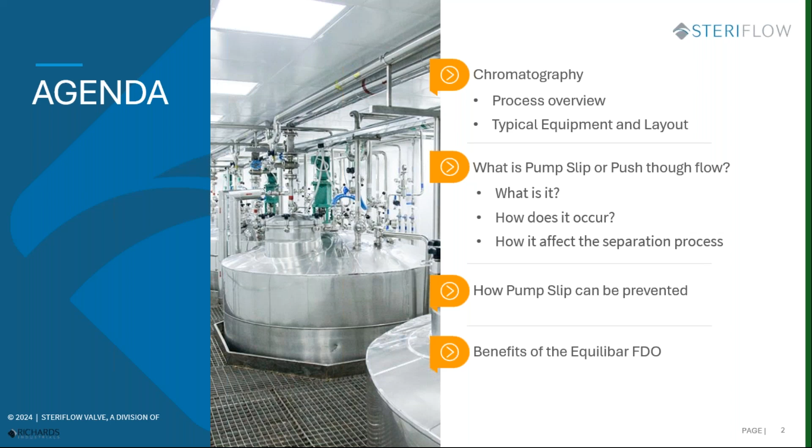So just to highlight the initial application of chromatography: it's a very critical step for purification in biologics, and a very commonly used process. Basically, it works by using buffers of different pHs that are flown through a column packed with various resins to achieve a level of separation. The more precise and controlled the buffer flow is into the column, or the gradient into the column, the more efficient the process will be in increasing the overall yield of the biologics you are producing.

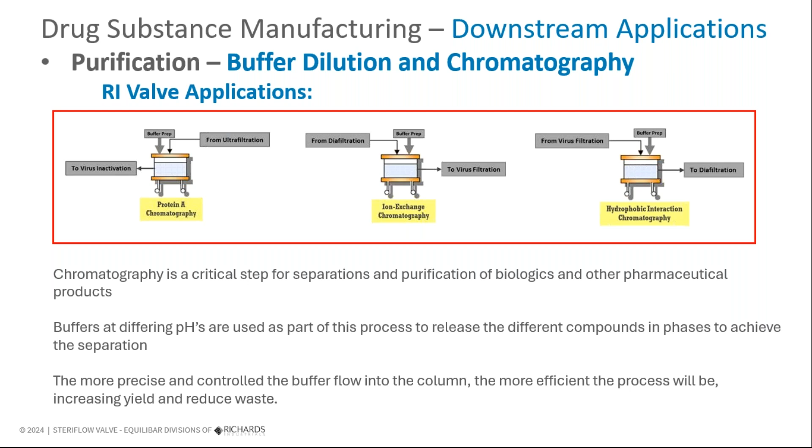If this process is effectively carried out, you will reduce waste as well, because the buffers and product in the column are very expensive to maintain and produce. So ultimately, the goal is to have a very high yield, a very efficient column, and ultimately reduce waste and improve the product coming out of the column.

So this is a very simplified schematic of the chromatography process. Typically this starts with several different buffers that are blended as needed through the column, to achieve the desired pH in order to remove various proteins out of the column. So in an application like oligonucleotide production, you're going to be producing various long chains of proteins that will adhere to the resins within this column.

Once these proteins are built and are required to be pulled out of the column and separated, each protein will have a different pH that will cause it to release from the column and be separated and removed for further purification. As you need these buffers, they are blended in real time, and they will vary through the column. These are blended using positive displacement pumps, which are used to control the flow into the column. As you need different pHs, the pumps are adjusted and then flown into the column.

You also want to reduce the amount of pulsations going into the column, because pressure pulsations can lead to disruption of the resin beads and potentially damage the proteins being produced. So the key to chromatography is having a really precise gradient elution, and reducing the amount of disruption from pulsations into the column.

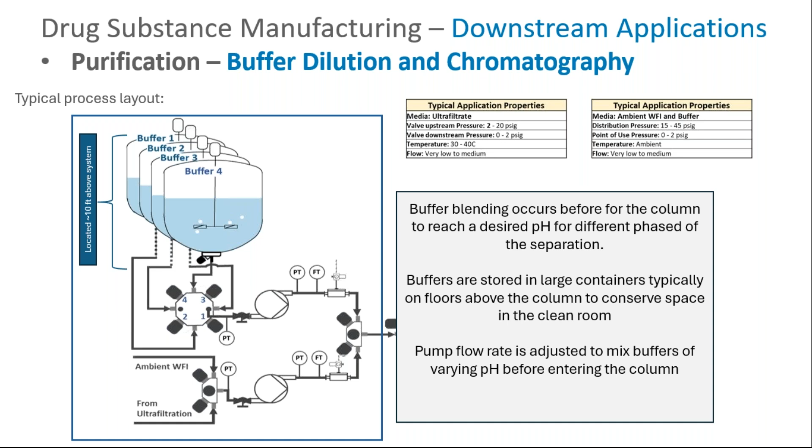This reduces space, but it also creates a head pressure as the buffers flow into the pumps. So the pump flow rate will be adjusted as the buffers are needed to mix, but then the head pressure needs to be taken into account. If you don't store buffers above the clean room, typically these are in big vats. So even in small chromatography systems where you don't have large buffers above the clean room, you can still have big tanks that also produce head pressure.

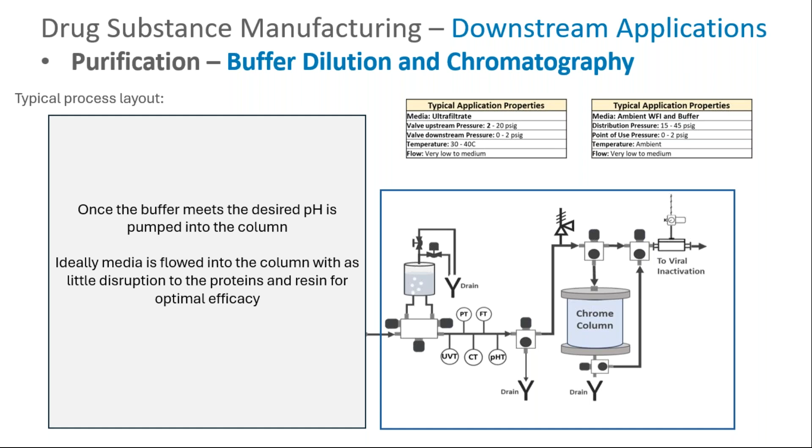So the second step is once the buffer meets the desired pH after being blended with the pumps, it is then pumped into the column. Ideally, this media flows into the column with as little disruption as possible so it does not affect the protein chains or disrupt the resin. All of the resins are very finely packed in a highly engineered way to get the precise surface area required to achieve the separation. As you have pulsations going into the column, you can disrupt the resin matrix, which will affect the overall yield or separation, affecting the amount of proteins or biologics you are hoping to achieve at the end of the cycle.

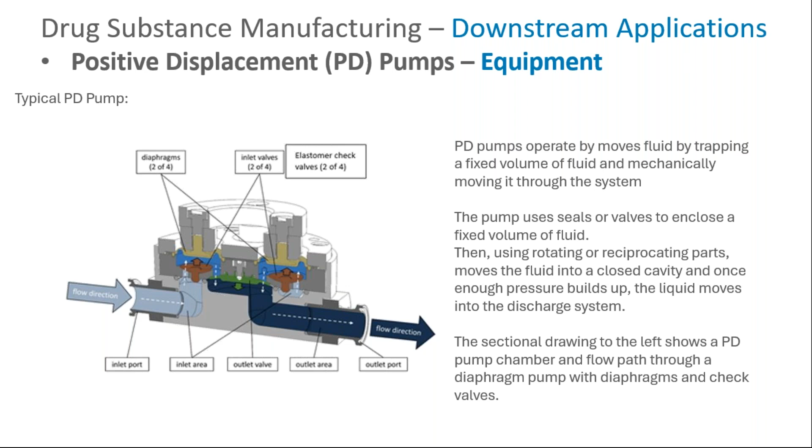So simplifying the schematic a bit more, you have a pressurized tank above the clean room. A typical one floor above could be anywhere from 7 to 10 feet above the actual clean room, generating about 3 to 4 psi of static head pressure due to the weight of the media in the tank. This is mostly done to preserve room in that clean room. The clean rooms are smaller areas and don't have a lot of room to store multitudes of different types of buffers, so by moving this above the floor, they are able to save a lot of room.

However, you do generate that head pressure. So like I said, 7 to 10 feet, you're looking at 3 or 4 psi on average. But if you have larger tanks or stored on higher floors, you can have a significant level of head pressure. This can be referred to as either elevation pressure or net positive suction head. Ultimately, it is just a higher level of pressure than atmosphere if the pump was starting at an even pressure.

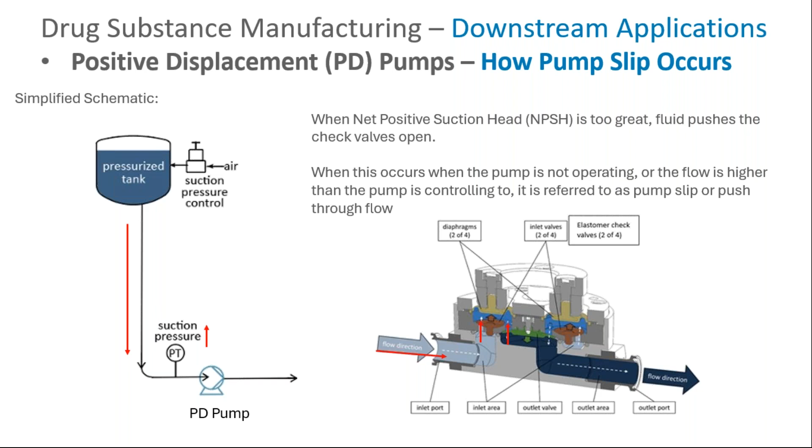So the higher this tank is stored, the more head pressure is generated, which increases that net positive suction head. This can cause an issue of push-through flow or pump slip, meaning since this pump is meant to be starting at standard pressure, the flow or positive head pressure will push through that pump, filling the chambers and cavities, and push through even when the pump is off. So when the pump is at 0 RPM, not operating at all, that positive head pressure is enough to push media through the channels of the pump and continue flowing.

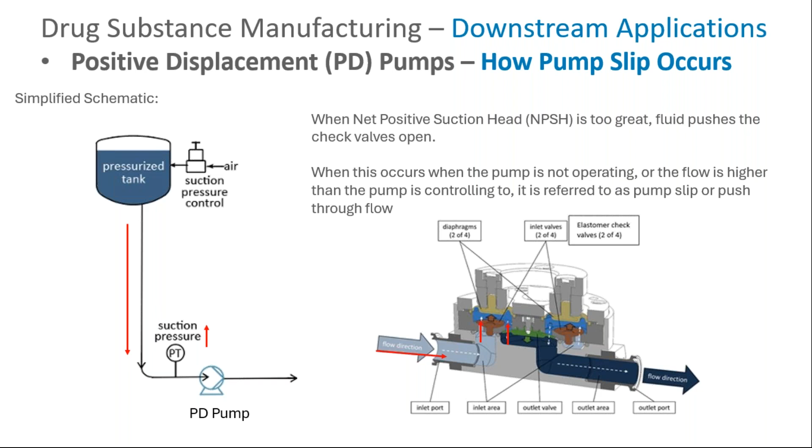So this is referred to as several different things in industry. Pump slip is very common, push-through flow is very common. What this means is even when the pump is off, there will still always be flow occurring, especially as you have that higher head pressure if you're stored at higher elevations in order to preserve that room.

So what does this mean for a chromatography system? Push-through flow overrides the pump's ability to actually do effective control at lower ends of the pump range. Since you have a net positive pressure, the pump cannot operate at those lower pressure levels. If you want to control flow rate at low pressures, the pump does not have the ability to counteract that head pressure.

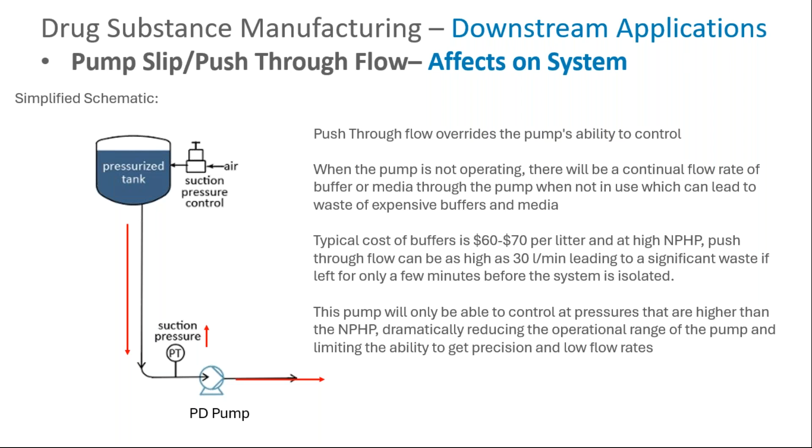So how can we prevent this? There are several different ways end users look to prevent pump slip. One of the most common, and most readily thought of, is to simply put an isolation valve right at the outlet of the pump to turn off the flow once the pump is off.

So once you're done running your system and the pump is turned off, you still have some level of push through flow. You can simply turn an isolation valve off to prevent any flow rate into the system. Typically there's still a little bit of a lag, because you want to make sure the pump is off before the isolation valve is closed, so you don't cause any damage to the pump. So if you turn the pump off, there can still be several minutes of push through flow until that isolation valve fully isolates the system.

Now, it does limit the amount of waste you have, but you're still going to get a few minutes of waste, and even a few minutes of waste can be hundreds of dollars depending on the level of push through flow or pump slip you're going to see.

The biggest risk here is that if you just have isolation valves in the system, and the control loop isn't tuned correctly, or there's any damage or miscommunication in isolating those valves, you really want to avoid isolating the pump before the pump is off, because that can cause significant damage to the pump. So there is risk there.

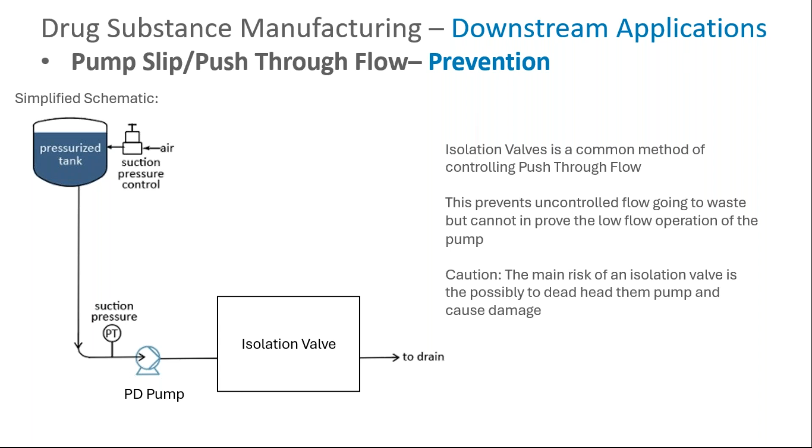These pumps are very expensive in a sanitary process, so there are better ways to reduce pump slip and also get more use out of your pump. This is the key topic we're going to talk about today.

The best way to really reduce pump slip in these types of applications is a high precision back pressure regulator that allows the pump to slowly turn off and limit or eliminate any push through flow, by having a set pressure equal to that net positive head pressure. Basically it cancels out that positive head pressure by setting the back pressure regulator to close right at that same level. So when the pump is turned off, the back pressure regulator closes off and eliminates any push through flow.

But also, because it's only counteracting that net positive head pressure, once the pump turns on again, you do not need to make sure you open an isolation valve. That pump can simply turn on and it will overcome the set pressure of the back pressure regulator and immediately start working and flowing media into the column.

This also allows the pump to run at much lower RPMs and much lower flow rates, because the back pressure is being held constant, and the back pressure regulator is effectively canceling out any of that net positive head pressure. So you do not need to limit the pump's ability to run at lower volumes.

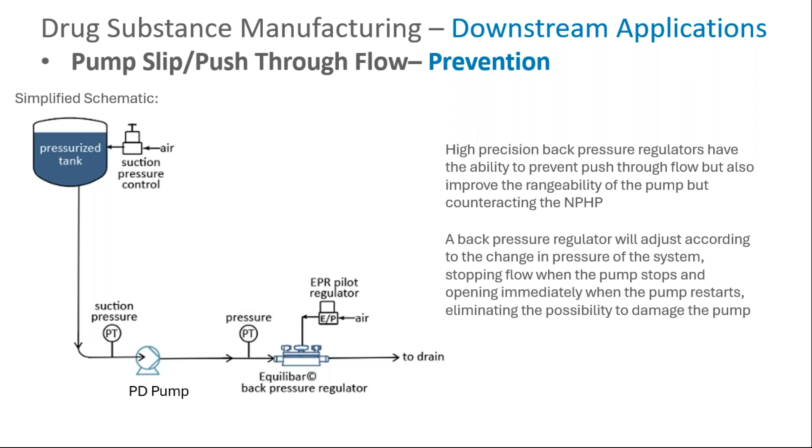Now, 7 feet is a very small distance. In actuality, a lot of these are stored much higher, but for the sake of this example, 7 feet of elevation, 3 psi head pressure — this means that even when the pump is off, so the pump is not pumping at all...

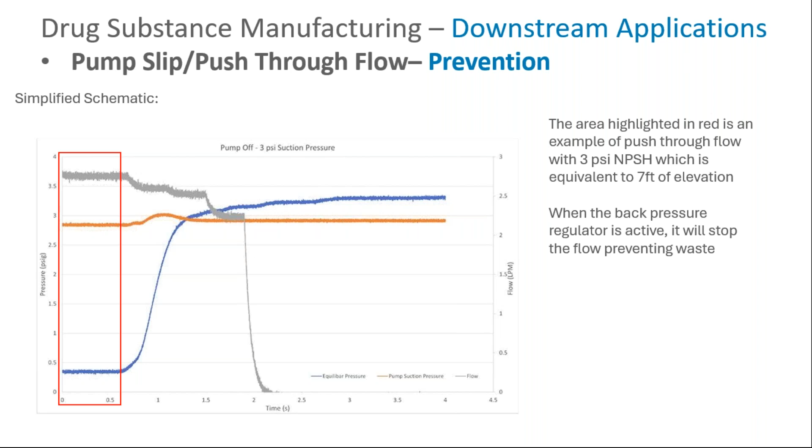So another way to look at this: because a pump can only operate over that net positive head pressure, we have 2 systems here. One is 7 feet of head pressure, or 7 feet of elevation. The second flow rate is about 10 feet of elevation. So a 3 psi net positive head pressure and about 7 psi of net positive head pressure.

Most pump manufacturers will even limit the rangeability of their pumps to about 20 to 30% above the low end. So if you're able to run from 10 to 100 RPM, they'll mention to try to stay around the 20 or 30 range, just to make sure you counteract that positive head pressure, because you can't get control on that low end.

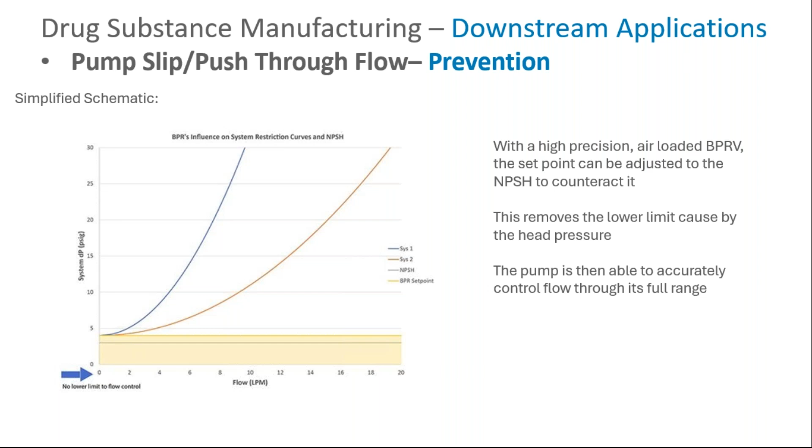When you have that high precision back pressure regulator and you're able to completely counteract that net positive head pressure, you're effectively changing that y-axis, allowing that pump to work at the very low end since it doesn't have to worry about that positive head pressure anymore. So this is the same curves and the same different options, but now that gray area has been shifted down, so you're able to accurately control at much lower flow rates of 1 to 2, single-digit liter per minute. We have seen in our lab that we can control pumps down to single-digit RPM and get very fine control at that low end, because that net positive head pressure is completely counteracted by that set pressure of the Equilibar.

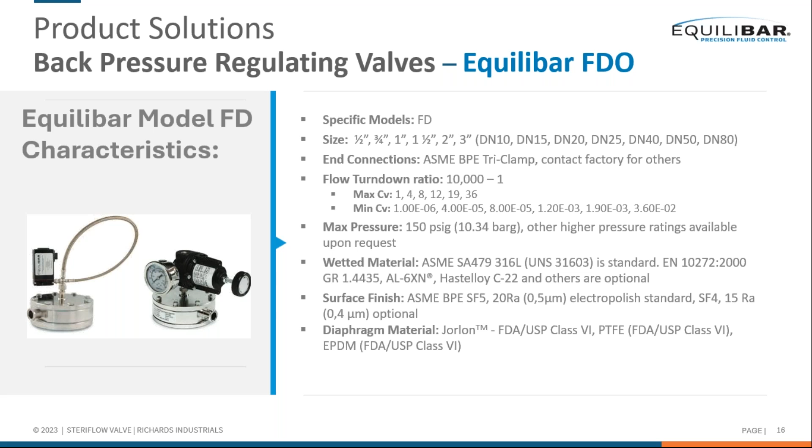So moving into what this product is, how it works, and why it can be so effective in this application: this is a sanitary back pressure regulator. It is air loaded, so a 1-to-1 air load, and it works by having a 1-to-1 air load of the set pressure to the back pressure.

Unlike some standard back pressure regulators or control valves that most people are used to seeing, this valve does not operate with a singular plug and orifice that moves up and down by either an air load or a spring. The control mechanism of this valve is this diaphragm right here and the air load on top. So instead of the media having to push up on a plug or a spring to affect the flow rate or pressure, the media is in direct contact with a diaphragm that is force balancing against that set pressure.

As the media comes in, if it's a small change in back pressure, so if this set pressure is set to 5 psi, as soon as the pressure of the system gets just above 5 psi, that diaphragm is going to start to move out of the way and allow the smallest amount of media to relieve out of the valve. And if it's a much higher change, so if you need a much higher flow rate, it will move the entire diaphragm out of the way and engage in the multitude of orifices that it has. So a very high rangeability and a very high responsive time, since the only thing moving is this thin diaphragm, rather than having to overcome spring tension and hysteresis of the springs, or even moving a plug up and down like in this design here.

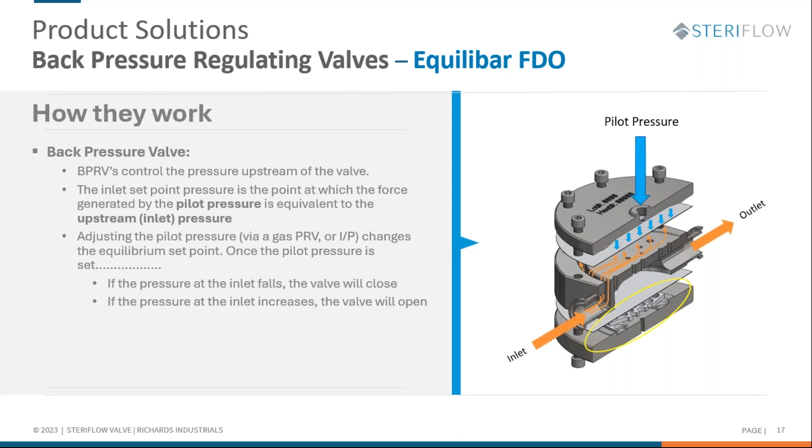One of the other things that is very critical to chromatography is limiting the amount of pulsations. Pumps in general are pulsation creators, right? So even if you have a very high-end pump that has minimal pulsations, just due to the fluid dynamics, there are pulsations that occur. And since this valve operates by having media flow through and basically be sandwiched between two separate diaphragms, it has pulsation dampening properties.

One of the design features this has is this crush pad right here, which was specially designed to limit the pulsations even further. In the standard configuration, these pulsations are reduced about 25% of pulsation amplitude in the trials we have conducted. So not only do you have this fast response time and elimination of push-through flow, you are also able to help reduce the pulsations flowing into the column. As I said, pulsations can affect the resin, which ultimately affects the separation process and the yield you get out of the column. So it is very important that pulsations are reduced.

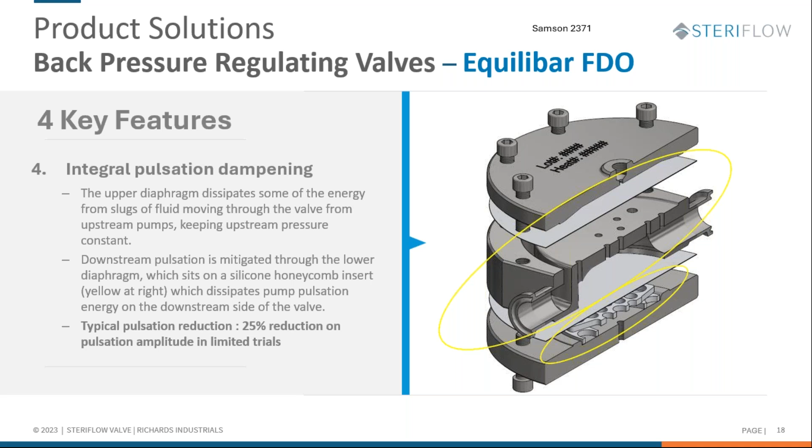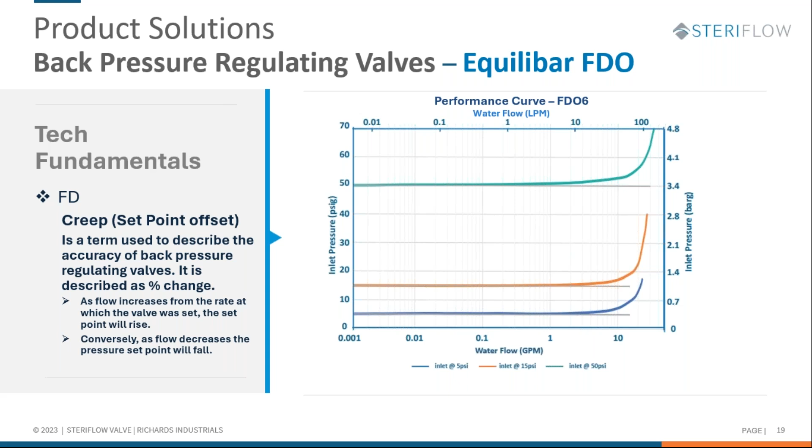These can be controlled by either a manual or electronic pilot. So if you want to set the set pressure to just have a static counteraction of that net positive head pressure - if the net positive head pressure is always 5 psi, you can have a manual pressure regulator controlling that pilot pressure, so that back pressure is always controlled at 5 psi. Or if your pressure changes over time, as your tank gets lower and lower and that pressure changes, this can also be controlled by an electronic pilot, which feeds into a pressure sensor that adjusts the set pressure so it can respond in real time to the actual net positive suction pressure of your system.

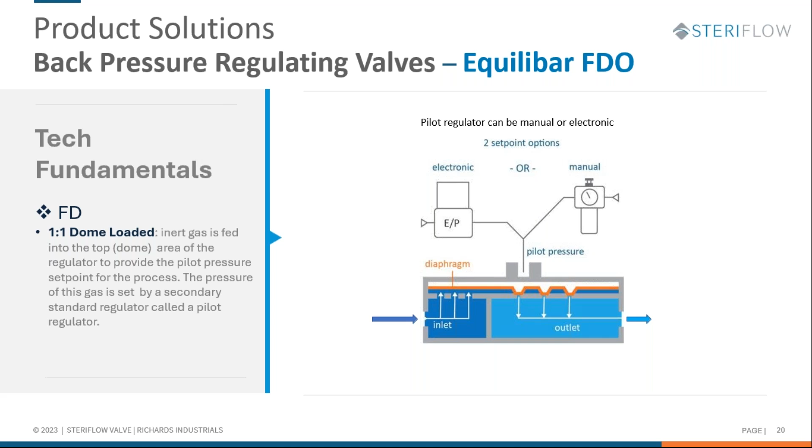Just some fundamentals - these valves are fully drainable. We know how important sanitary requirements are in this process. In the orientation with the inlet facing down, the valve is designed to have a channel here where all the flow will fully drain just by gravity. If you do need to install it in different orientations, the valve can be installed in any orientation with the use of an air blow to have it fully drained and fully sanitary.

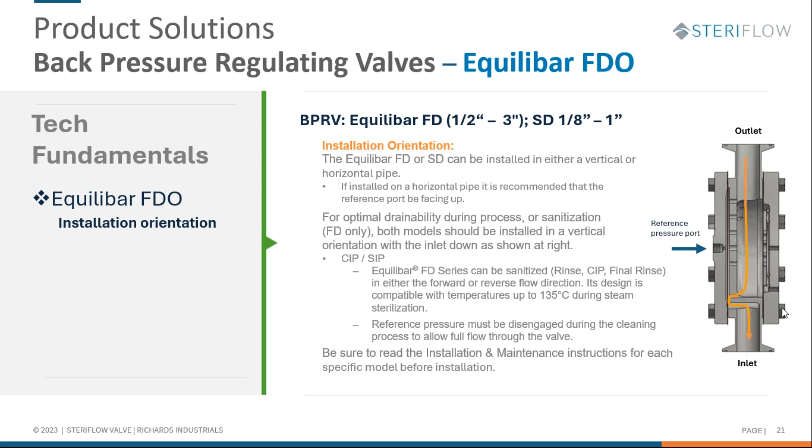Very easy maintenance because there are no moving parts. You have the 2 diaphragms here and the crush pad, so these valves are tested to work for a very long time, and you don't have to worry about lots of parts when you compare it to, say, a control valve, which has a lot more moving parts that can either break or need replaced over time. This valve is meant to operate for a very long time and maintain all of those sanitary properties.

And then just to sum up, we have worked with a lot of customers in this process because it is very prevalent through the biopharma and pharma markets. Chromatography is a very important process, especially into markets like oligonucleotides, which are rapidly growing and have their own challenges. Push-through flow is a big waste on a lot of these applications. Eliminating this waste helps the process become more cost effective, but more importantly, it helps the pump control at a much higher and more precise level, and ultimately improve the yield and separation process for a better product at higher quantity.